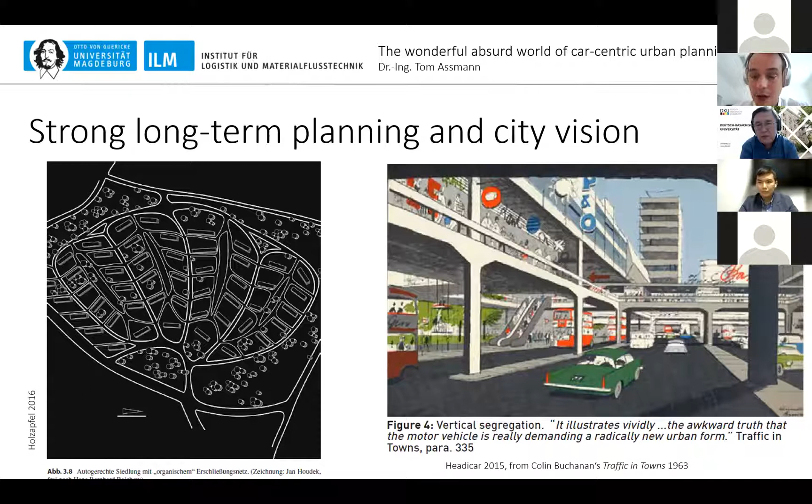It was built to really demonstrate how the future city should look, with very large freeways and skyscrapers. If you look at it, you have skyscrapers, some green areas with some trees, and you have freeways. This is what the Futurama city is about. And the things which make a city very interesting, small, narrow streets, some plazas, and so on, are completely gone. There are very large distances between buildings, very high buildings, and everything just connected with cars.

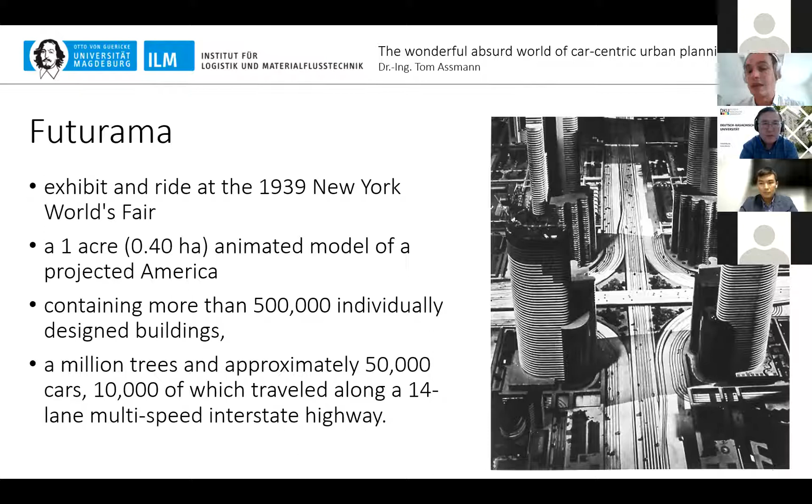Because it had been one of the most influential world fairs, and people could walk around and above this model, it made a big impact on the perception of how a city should look, and how we as a society should move ourselves in it with this new mode of transport, the car. This makes it so successful, because it really changed the perception of a city and how it should look.

And then there had been some very successful instruments to implement this. First is strong zoning regulations. So in certain areas of the city, you can just build single family houses, and in other areas, you can just build industrial areas. So really to separate cities and make it clear that cities are separated into different functions.

The single family home itself is a great means to promote car use, because in these suburban areas you cannot really use public transport. You cannot really walk. Suburban areas are made for car use. And if you look in the advertisements of car companies, again, you have the single family house, the parking, and a car in front of it. They belong together. And to promote this form of living, you promote car use.

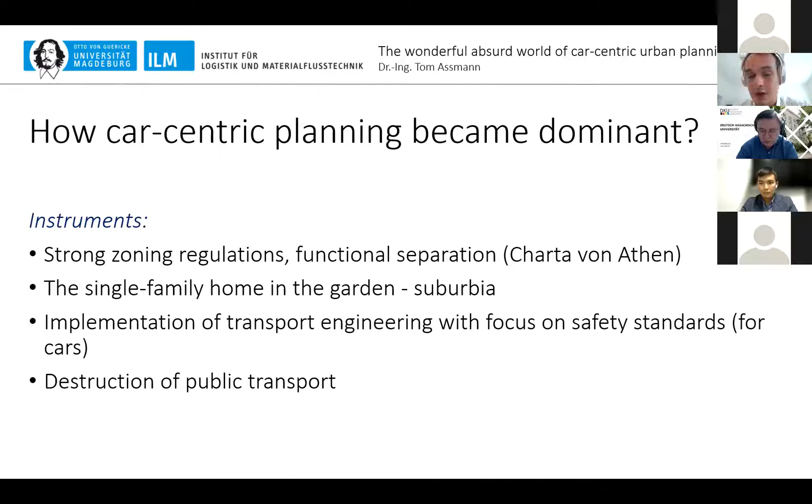And then they implemented transport engineering programs, which made strong standards on how roads and streets have to be built. And once implemented, people followed it. And lastly, the destruction of public transport. This is what really happened.

On the right-hand side, this is the big tram scandal which happened in the United States of America. These are photos from 1956, and they show tramways which were bought by General Motors and then destroyed. The United States car companies systematically bought tramway companies just to destroy them in order to sell cars.

And on the left-hand side, some of you may remember, this is the tramway from Almaty. Almaty also had a tramway, but it had to make space for cars and partly also for cycling paths, as I was told. Instead of extending such a system, it was destroyed, and this is a pity.

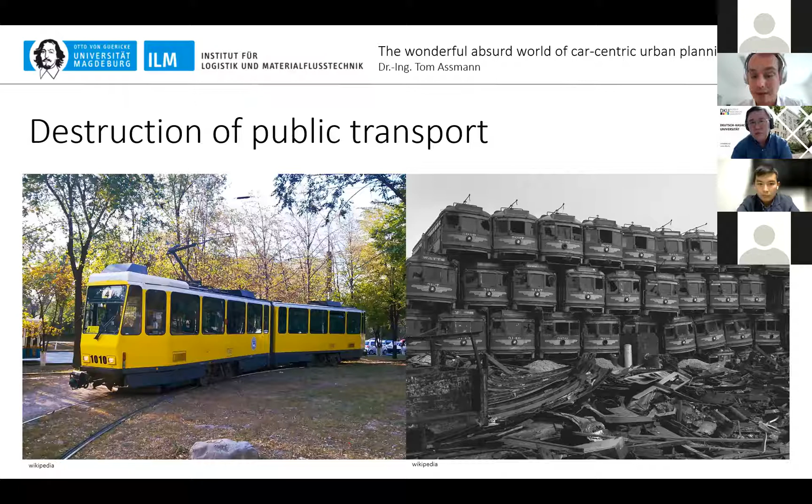So this is where we come from. This is how, in the last decades, cities changed from a place which was basically built around walking, public transport, and cycling to a place which is dominated by car. And this means that there are some pretty interesting facts and some absurd results coming along with it.

And it's not just the case that this is from Almaty. Those are two photos from my hometown, Magdeburg. And also here in Magdeburg, you can see this is a street, and what you can see on the street is asphalt, is traffic, and that's it. In contrast to Almaty, you cannot even see trees here. Maybe at the far end of it, but not here. On the right-hand side, what you see is a parking lot of a shopping center. It's empty. It's a huge waste of space.

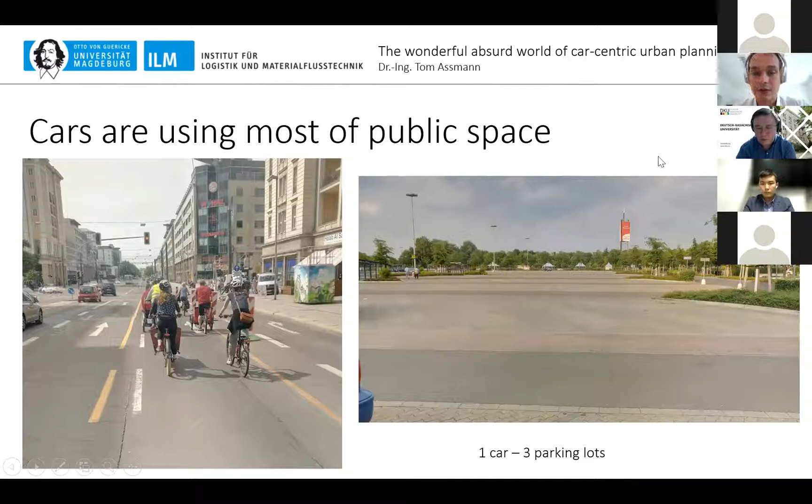And if you look into some figures, there had been a study in Germany. In cities, people have on average a living space of 46 square meters per person, and a space for transportation of around 224 square meters, 5 times more. And think about what you do. You live, but what you do is to allocate most of the space to traffic and to transportation. And this is a strong difference.

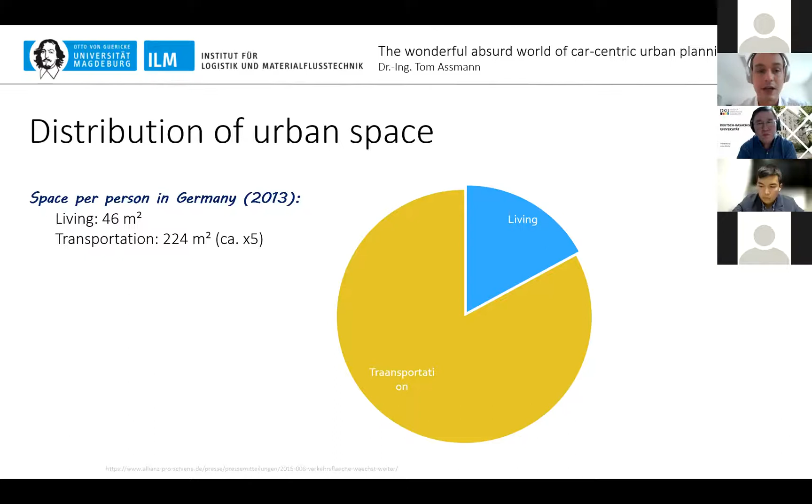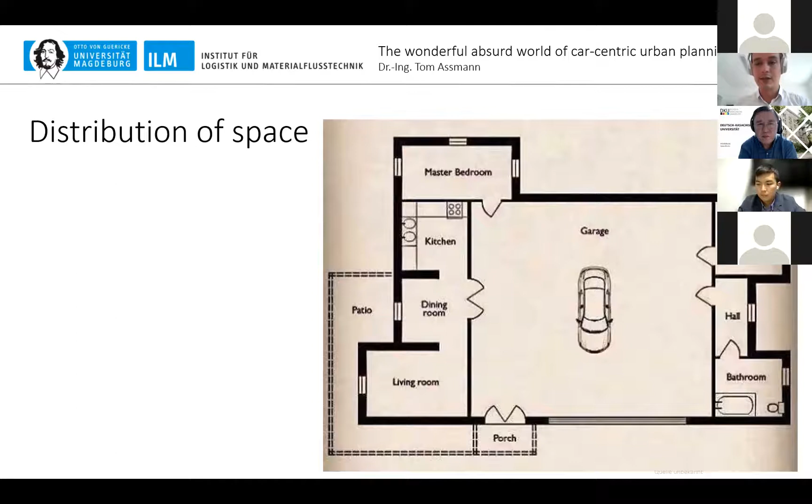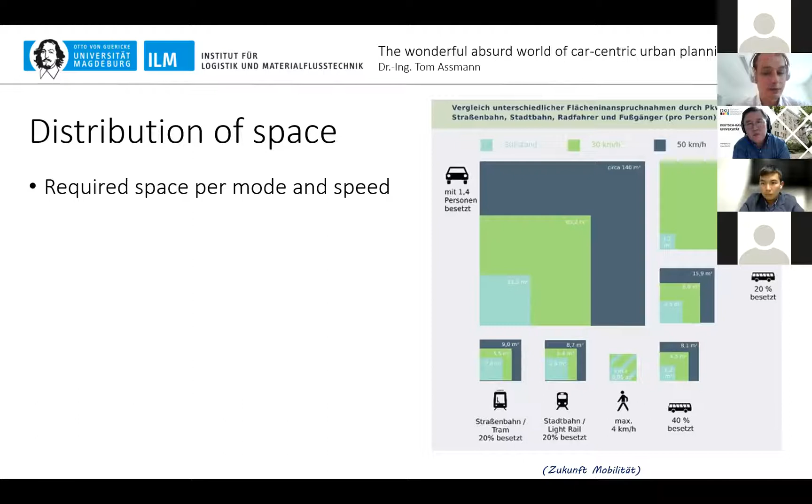So you have a car, and around it there are 140 square meters of free space. This is much. I think it's more than your flat is large. But this is what we allocate to cars, so that they can move at 50 kilometers per hour. And this is pretty much, and this is a bit absurd if you compare it to our living space. And this also results in some funny effects.

If you look at those big streets in a city, it's not really easy to cross them. Those big streets where cars run at 50, sometimes even 60 kilometers per hour, you cannot cross as a pedestrian. You need to have special intersections with traffic lights or something where you can cross. I learned in Almaty it works a bit different. We come to this later on, but at least in Germany and most European cities, you as a pedestrian are forced to the sidewalk, and then you have even cars parking on the sidewalk.

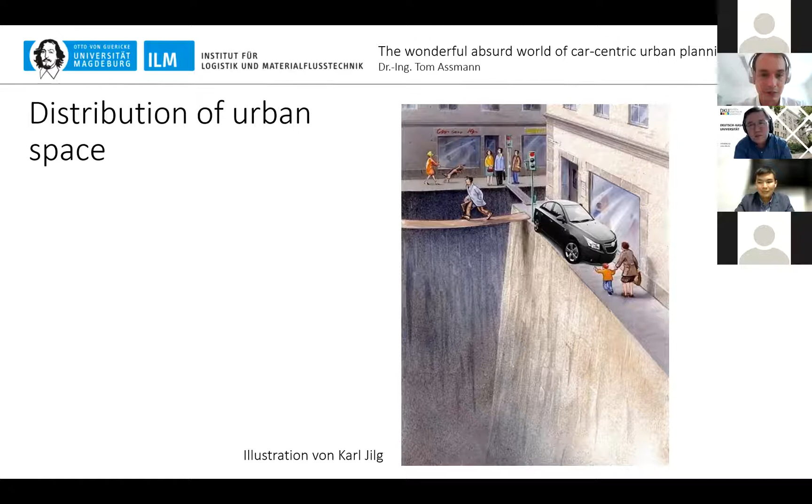So this is kind of the reality. You cannot really use a street, and you cannot even really use the sidewalks. This is because we attribute so much space to cars. It could be different.

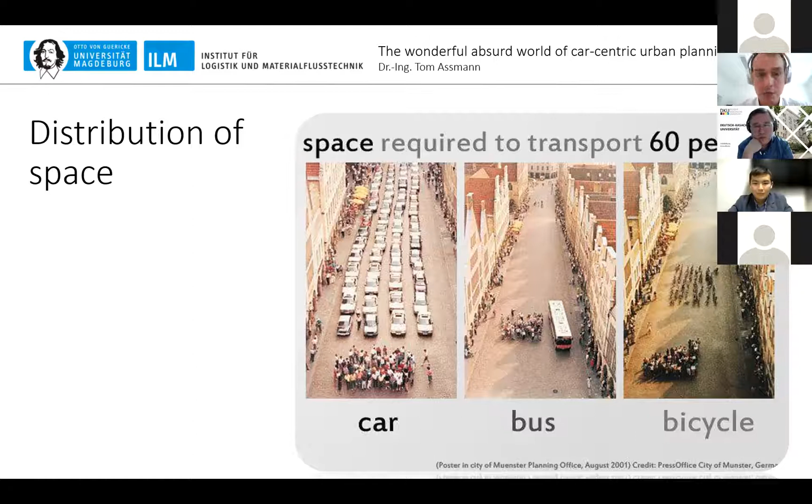On the internet, you can find many different versions of this photo. On the left-hand side, if you transport 60 people with cars, this is the space you need. If you do it by bus, it's the space in the middle, and if you do it with bicycles, it's also way less space than if you do it by cars. It just makes it obvious how much space is wasted for cars.

And the waste of space is not the only thing. It's also safety that makes it absurd. Cars are the most unsafe means of transport. And instead of thinking, okay, how can we make cars more safe, what society currently is doing is making cars more and more unsafe for people outside the car. Within the car, you are safe.

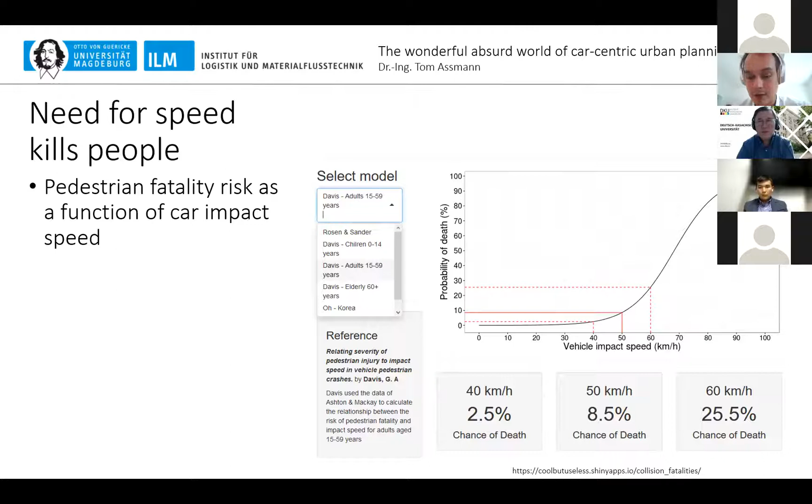And it's also speed. If you look at the chance of death, if you go at 50 kilometers per hour, which is the standard speed in most European cities, the chance of death if a car hits a pedestrian is 8.5%. If you lower the speed, it decreases rapidly. I think in Almaty it's 40 kilometers per hour. This is way better, as you can see, so it's actually a good situation here. You lower the chance that people die significantly. And in Germany, people still stay with 50 kilometers for some absurd reason, because it's obviously killing people.

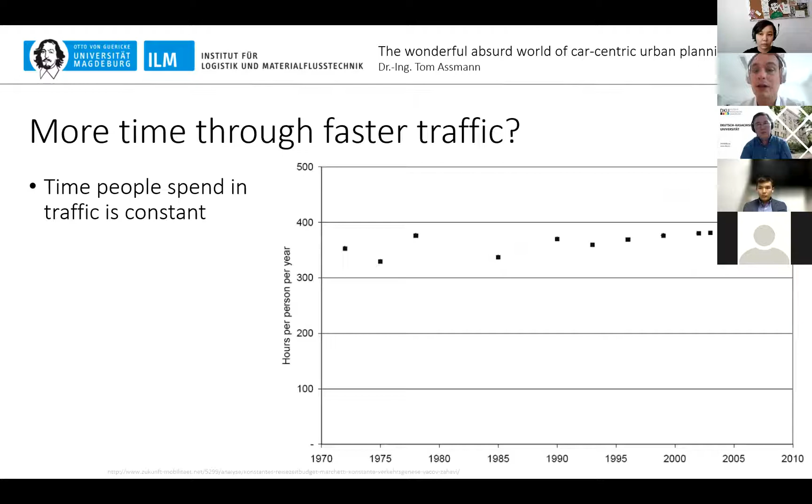And this leads us to the wonderful aspect that people always think we need to be faster in order to save time. But it's kind of a myth that you save time when you make traffic faster, because science tells us that people actually spend the same amount of time each year on transportation. This is the hours per person per year spent on transportation, and you can see it's in the same corridor over the last decades.

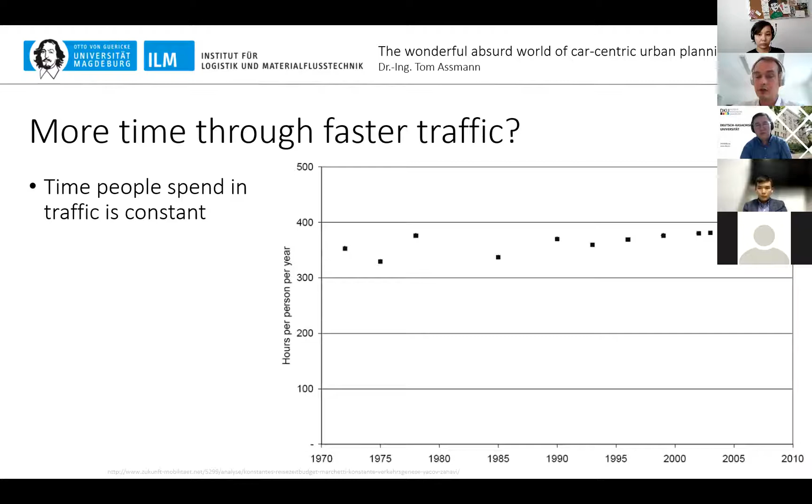So what happens if you increase the speed and keep your urban form, the shape of your city, the same? The assumption is that if you have the same size of city and make transportation faster, then you spend less time on transportation and you have more quality time, more time to spend on working, relaxing with your family or something else. This is the assumption.

But the reality is, because people spend the same time on transportation each year, higher speed with constant time spent on traffic just leads to stronger suburbanization, because people are willing to travel longer distances. And because they are traveling more within a city, you get more accidents, you get higher costs, and you do not have more time. You just have more traffic in a city.

To put it in a nutshell, making urban transportation faster means replacing short, safe, and cheap connections between parts of a city or people with longer, more unsafe, and more expensive ones.

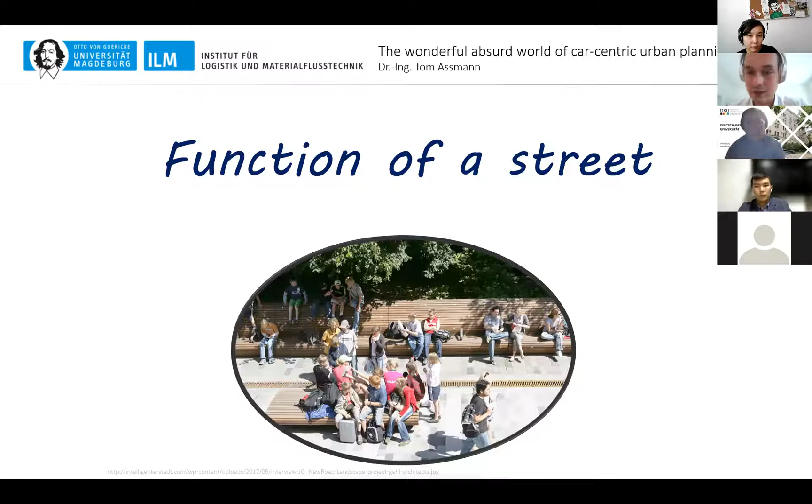I will use some more minutes to briefly cover the function of a street, to tell how we can change it, and then we will go into the discussion. In English it's more clear than in German, but there's a difference between the term street and the term road. A street is everything between the buildings, so the entire public space between those buildings. And a road is just the space which is allocated and designated for cars to move and to park.

And the street has way more functionalities it needs to fulfill than a road. A street actually is a public space. A street is the place where people living in the houses around the street, or working at the shops around, relax, chill, chat, meet friends, do business, have a coffee, maybe even do some gardening, and especially where they can walk freely and safely, not fearing to be overrun by a car. This is the basic concept of a livable street.

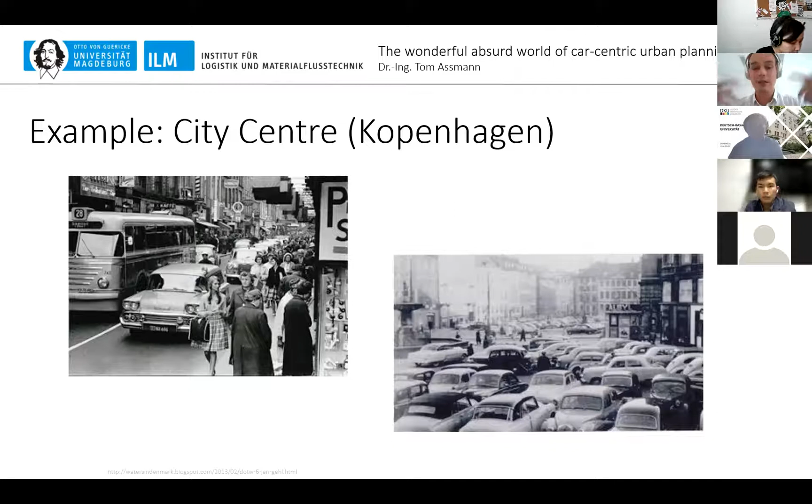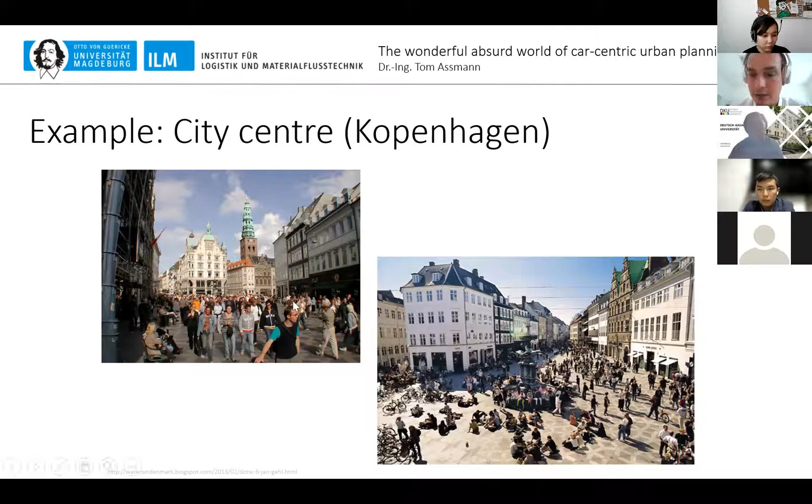And there are some examples, this is from Copenhagen, where this mind change already happened. So this is Copenhagen in the 60s, and this is Copenhagen right now. Not the same perspective, but those are the same streets. And they changed from a road to a street. They made space for people to walk. And actually they made space for many retailers, small companies, and so on to also earn a good living with those concepts of changing a city.

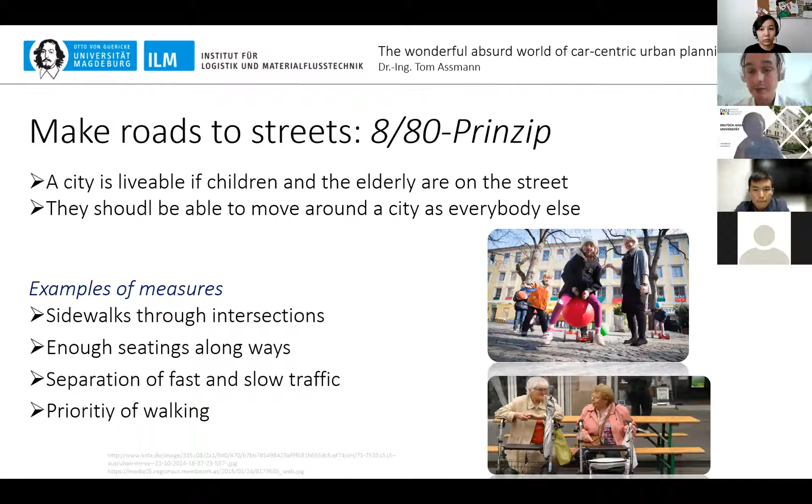And the other rule of thumb is to change priorities in urban planning: to not plan for cars, to plan for pedestrians first, for the most vulnerable people on the street, pedestrians and cyclists, then public transport, taxi, car, and at the end even the airplane, and also to rethink public transport.

Enrique Peñalosa, former mayor of Bogota, once said, an innovative city is not a city where the less well-off drive a car, it is a city where the rich use public transport. This is what we need to keep in mind when designing cities and public transport.

Yes, we just crossed at the pedestrian crossing, and the street can have 4 or 5 lanes. Every car will stop. And this is a priority for pedestrians. And it makes it safe and easy for people to use such a street and to cross the street. And this is a good step forward. The second positive point, and actually you can never do this in Germany, never try it.

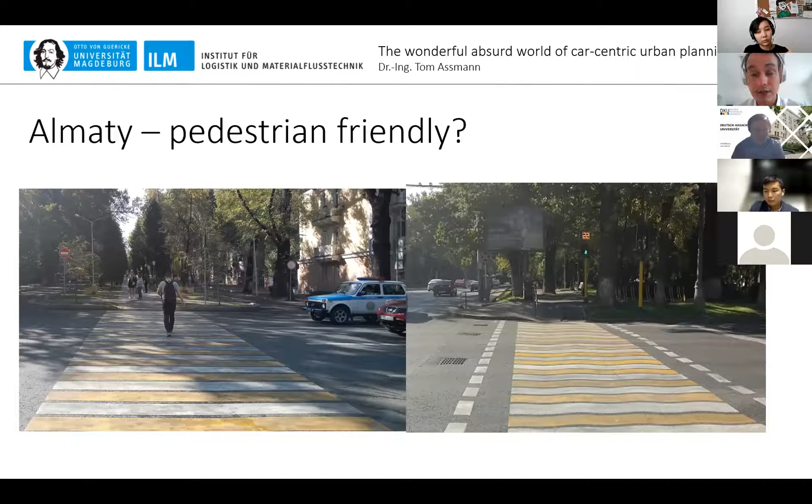And what I also like very much is you have a kind of secure separation. You have very wide roads which are dominated by cars, but then there's kind of a safe area, and then there are wide pedestrian walks and also shops and restaurants and so on, and a lot of green zone.